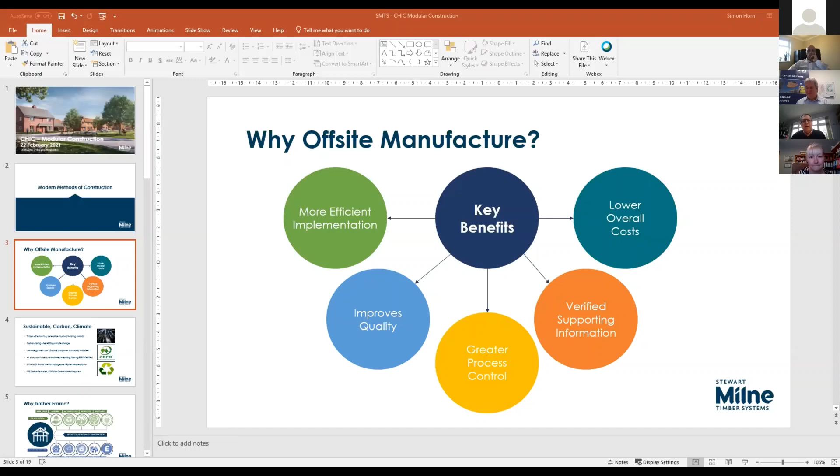Apologies, everybody. Okay, so yeah, why off-site manufacture? So more efficient, basically through the implementation program, because you're producing components off-site and then delivering them to site for assembly and installation rather than on-site construction. That's going to deliver quality because of the quality processes that we use within the manufacturing facility. And equally, that's going to deliver a greater process control to the project. And the project and the construction program is paramount because of not eroding costs to the project. So control of the program is key, and that process of off-site manufacture, just in time, delivering components into site, which is very efficient, but then equally maintains that program delivery for the overall construction program.

The supporting information, so basically the data to go with everything we produce, is verified, and to support that, those components and the solution for the project. So operational manuals, O&M manuals, easily achievable. Everything is produced in a CAD environment. We work on a BIM platform, so not necessarily people will work in BIM, but we adopt the principles of it because it's material control through the manufacturing process.

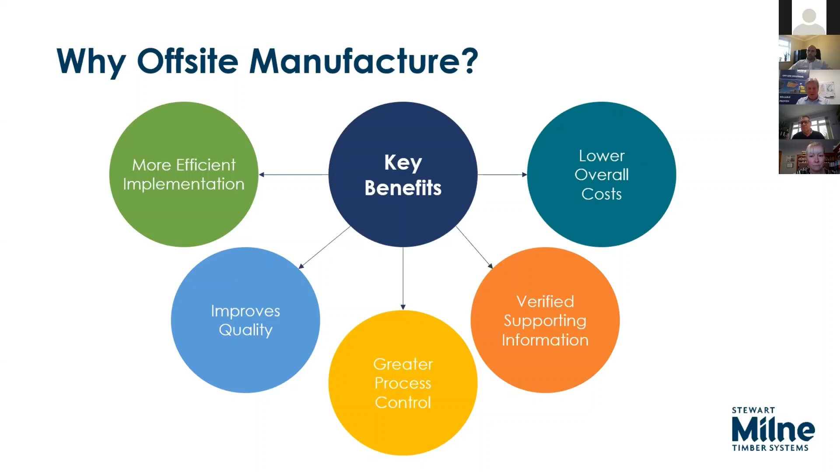Overall, if a project is planned, designed and delivered as an off-site manufactured project, it will deliver overall cost benefit back to the client and the contractor. If it's a late substitution, you've lost the efficiency of the early engagement that goes with off-site manufacture. That's a key requirement so you get the benefit through the program in the construction phase: early engagement and understanding of the solution being applied.

It's sustainable, it's a carbon positive solution, and it has a benefit to the climate because we use timber. It's the only renewable structural material that's out there. It grows naturally. We don't treat this lightly - it's a daily communication now in the press about climate change.

So for us, we get the structural capacity down through that timber. The homegrown stuff that's from Scotland and from Yorkshire doesn't grow so true, so we can use it for non-structural elements of the timber frame, but not for the structural walls.

Carbon storing - basically as the tree grows, it takes the CO2 emissions out of the atmosphere, which is again a key factor at the moment with carbon emissions and trying to get to carbon zero by 2050. By using timber, we're on that journey. The trees take in the carbon, store it within the tree as it grows, and it's locked in. It doesn't release it once the tree is felled.

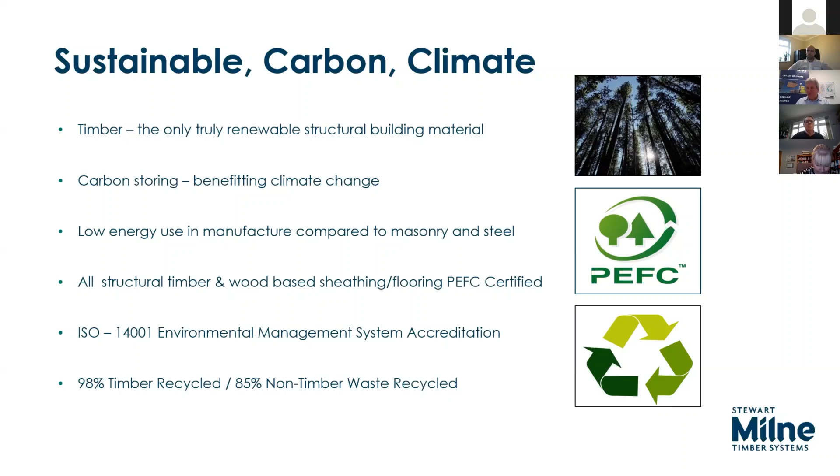I've mentioned it's a managed forest, so we're PEFC in our facility, and we know where all the timber is coming from. From our own business point of view, we're ISO 14001 and have an environmental policy. So timber anything we don't use is recycled - 98% of it - and 85% of cardboard, polythene, packaging, etc. is all recycled. Out of the yield of timber that comes into us, we use everything except about 3.8% at the moment, and 98% of that is recycled. So it's a truly carbon positive and sustainable building system and material in that respect.

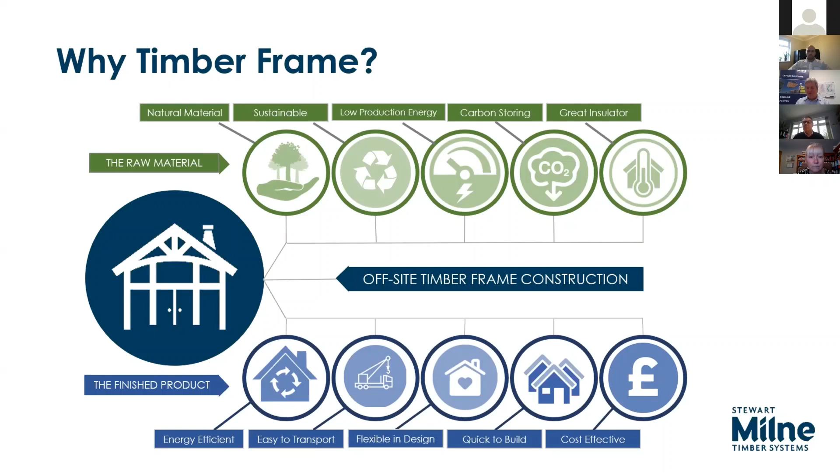I've touched on programs - generally for us it's a 4 to 5 day program for a pair of semi-detached houses or a large detached house. In 4 to 5 days the building is up and being handed over. And as I said earlier, if it's planned and delivered, it will be cost effective.

Then it goes out to site. We'll fit insulation, we'll fit windows in, and then it goes out to site for assembly.

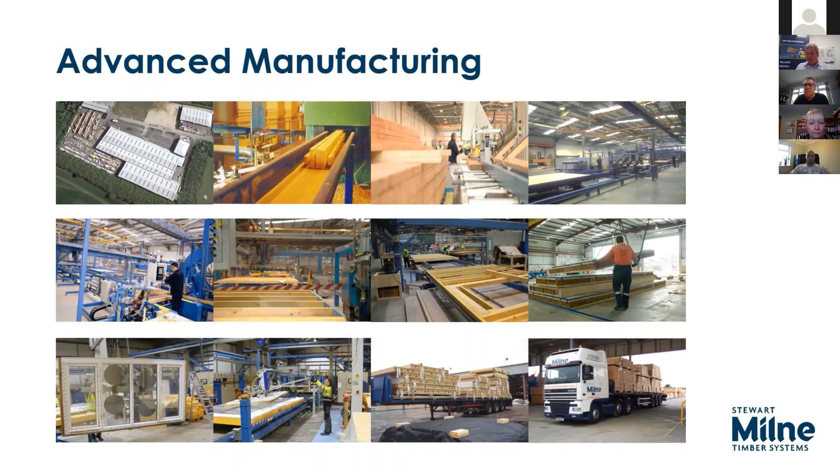That panel has got insulation in it. It's got the windows in it, and it's got the battens for the service void all fitted on the inside face direct from the factory.

The floor cassettes, again, efficiency - we'll make them as large as we can to then transport. Generally 9.6 meters is the limit for transportation, but we buy the joists 15 meters long. So it's very efficient for us to get the best cut of timber from the stack of joists that come in. The wall panel, first floor, then repeats up.

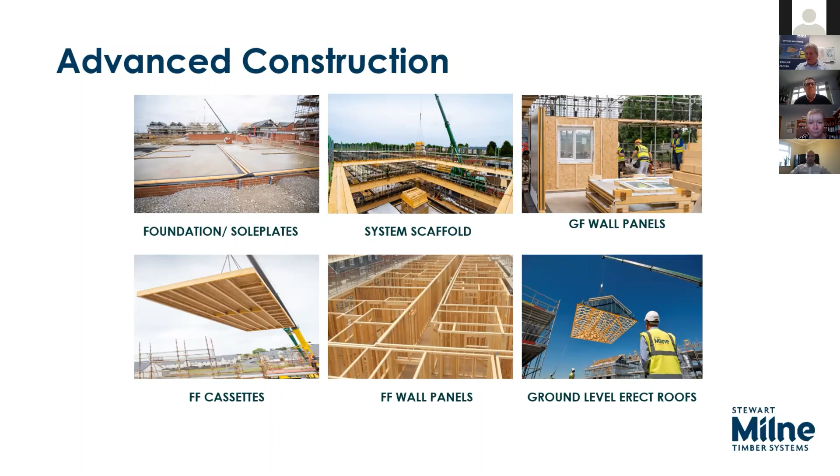It's platform construction in the UK, so ground, first, second, to the roof, etc. And ground level erect - again, health and safety benefits, working at height is eradicated by using ground level erect. So that roof has been framed on the floor and then lifted in.

The quality side of things, being off-site manufactured, is very controlled. We're in a factory environment, so we have all the accreditations to support that with regard to management systems, and then the third-party accreditations for the actual solutions that we are providing.

We've got a BOPAS accreditation for our closed panel, so that's a 60-year warranty, deemed as 2 mortgage cycles. The NHBC - we're approved under the NHBC Accept initiative for our off-site closed panel system. So those are the third-party accreditations that give confidence to customers and end customers that what has been built has been tried and tested and approved.

The BBA certification, again, goes with our closed panel system, being that it's a more advanced system. This is modern methods of construction. This isn't the timber frame of old.

As an MMC delivery partner, Stewart Milne will design and engineer a structure, make all the components, then install those components on site, and then hand that over to the developer or the contractor for fitting out externally and internally.

We've got our own homes business, so as well as Stewart Milne Timber Systems delivering externally to customers, we deliver internally within our group, Stewart Milne Homes. We've been doing that for 46 years - that's where it started. Stewart Milne Timber Systems and Stewart Milne Homes started in 1975.

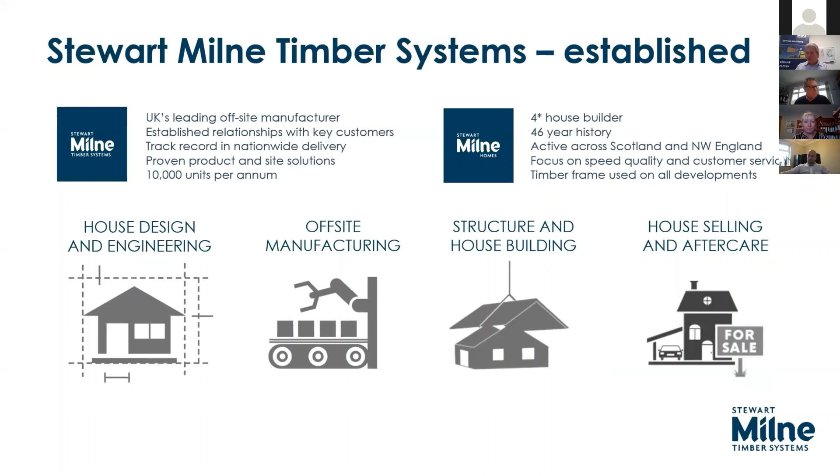We're UK spread - Aberdeen is the head office, but then we've got offices we call hub and spokes. The 2 hubs are Aberdeen and Oxford, and the spokes, for manufacturing purposes, are Grangemouth and Glasgow. We're looking now at one in the southeast as well, as a smaller manufacturing centre to underpin and support the larger manufacturing centres. This means we're a local supplier to the building site to support at the front end, basically.

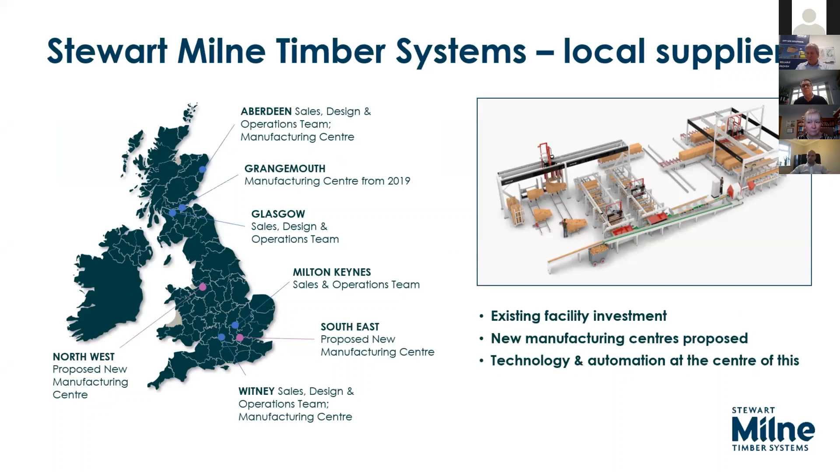They signed up for a framework to deliver everything using off-site manufacture and a panelised system for a 5-year period. We're in our second year of that 5-year framework with L&Q.

But equally, some of those other providers, including the CHIC organisation that we're here with today, are all recognised off-site manufacturer and Stewart Milne as a partner to deliver a panelised solution to the projects.

Equally, there's one consortium that have all joined - this is a real joined-up approach to delivering housing to local authorities, housing associations in the county of Hertfordshire. This consortium, headed up particularly by Watford Community Housing and Dacorum Borough Council, have all worked together, shared ideas, shared their thinking, and we are working with this consortium to deliver projects using a panelised solution.

A lot of these sites are brownfield sites because they're council-owned properties that are coming down and then being regenerated. So again, a panelised solution helps for that impact on the existing community - we're not there very long, it gets built very quickly, and then we're back out again.

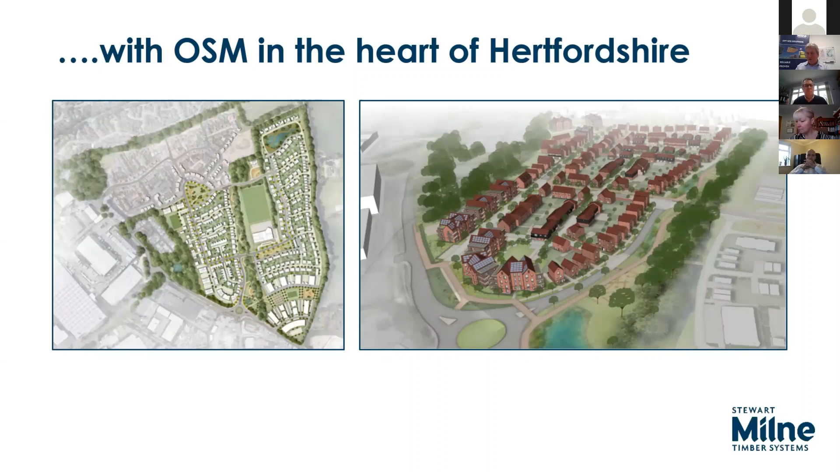The delivery partner for this is Countryside Properties, and we supported them with their bid for the project using a panelised system. It's 445 units, with apartment blocks in the bottom right-hand corner all built in masonry because of their size. Generally in timber frame it's medium rise, currently up to 5 to 6 stories, but with the expected change in Part B of the building regulations, that'll come down to a threshold of about 4 stories due to building height restrictions. It's a very successful project in development, and we hope to be hitting site later this year with the first units.

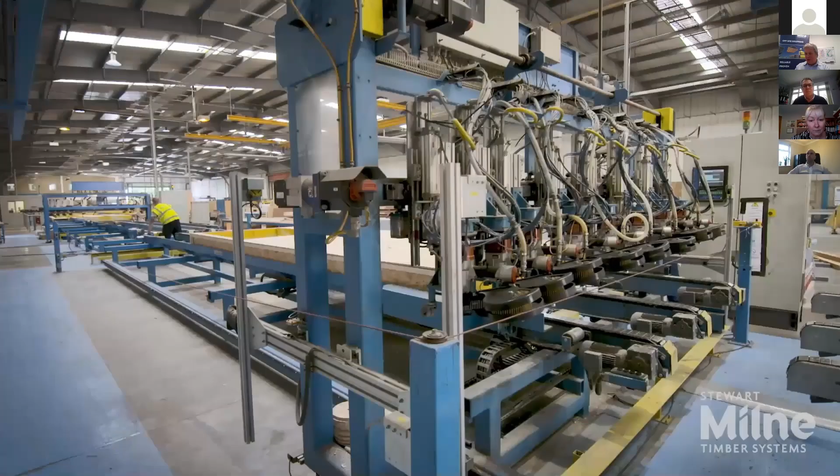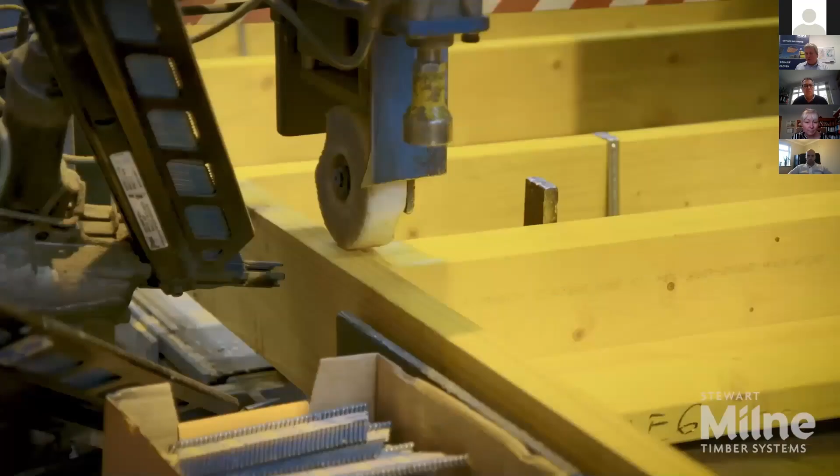This is our automated process in Witney, Oxfordshire - a moving production line. You've got a framing station, with a floor cassette going into it. This is the start of the wall line where the panel gets framed at the front end. The operative loads in the material, but the machines do the nailing up, which helps health and safety by reducing the risk. It's a much more efficient manufacturing process, driven by the CAD/CAM links I mentioned earlier.

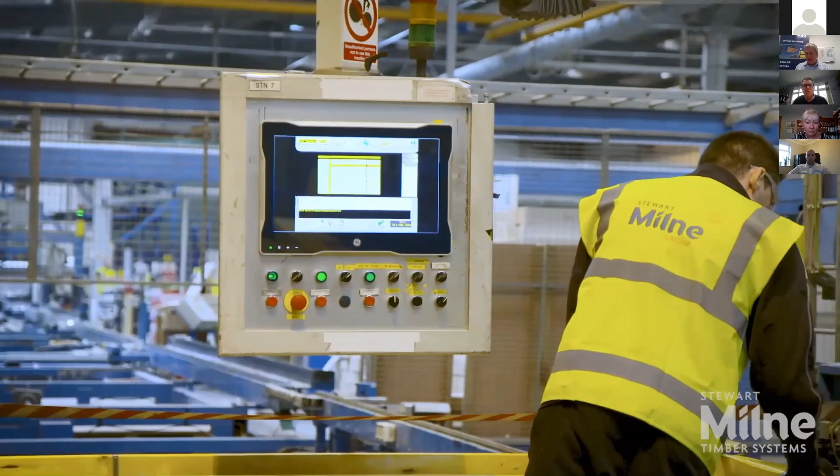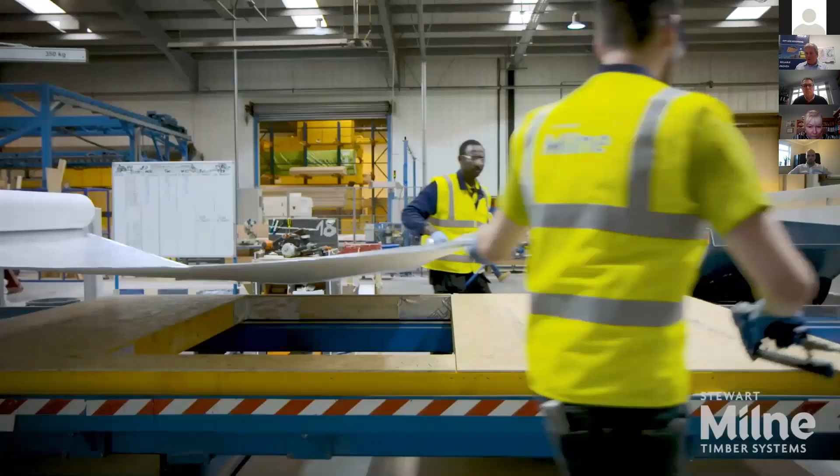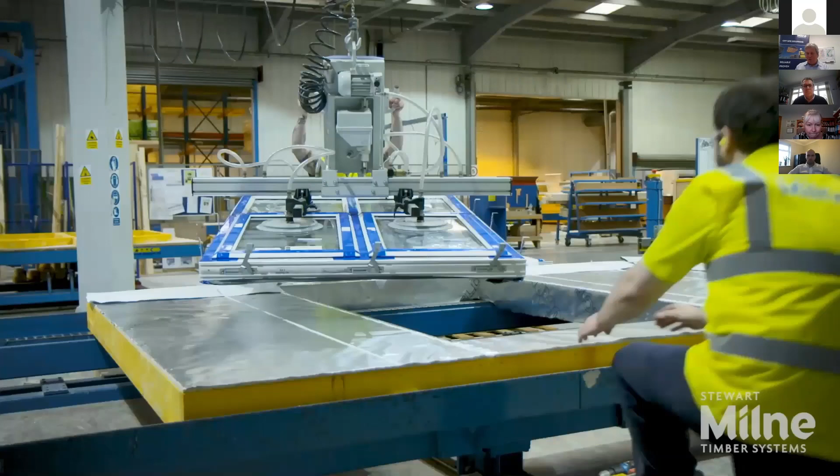We automatically blow in insulation when we get to the insulation station further down the factory - recycled glass. This is Knauf's product, recycled glass that they take and reblow back into fibre. That's now in the panel, and then the panel will be sheathed on the outside, again automatically nailed. Then the guys use a staple gun to staple on the breather paper, and lastly they'll fit in the windows down within the depth of the panel, and it will go off to sites where it will be installed.

So thank you very much, everybody. That gives you a brief snippet into

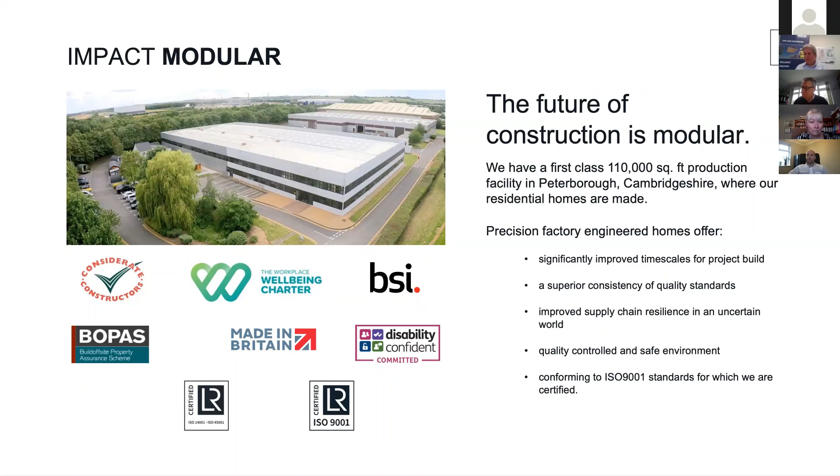We bring project certainty, higher quality, lower cost and faster delivery through our supply chain, logistics, digital design, parametric modelling and factory precision engineering.

Impact is a purpose-driven organisation, and we're committed to a transition to net zero carbon built environment in the UK and to ending fuel poverty. The government is relying on us to be the innovators and help bring the green recovery to life.

MMC can provide up to 67% reduction in energy consumption during construction compared to traditional methods. So sustainability is our top priority, and we require a supply chain to conform to our strict criteria. This applies to procurement, manufacturing, transport, construction, and also waste.

A single act has had a detrimental effect on the world as we know it, changing it forever. It really just goes to show how delicate the world is and how quickly it can change if we're not paying attention to our actions.

Post-COVID-19, the construction industry will never be the same again. Social distancing is far more effective in a factory, and to date we've had no spread of infections.

Now to design. We have an internal design team that are actively involved in every single project that we do. We also act as advisors to our external clients and provide support for planning submissions and detailed designing. We offer that full design service: technical design, energy modelling, M&E design, parametric optimization of sites, and digital client engagement.

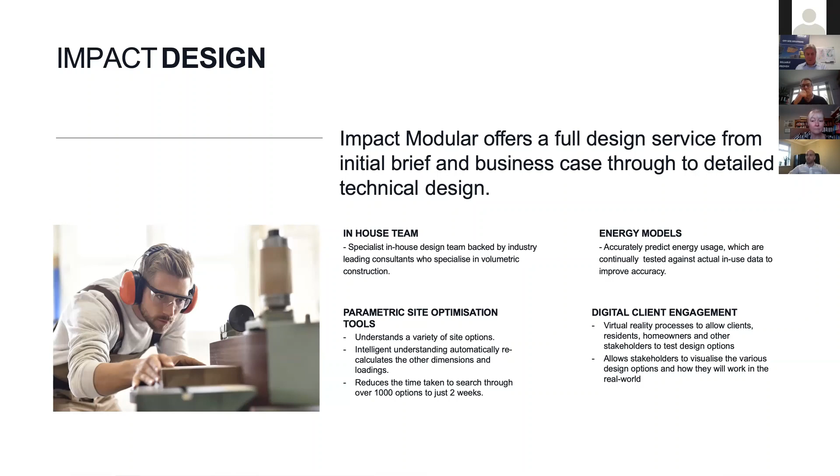We've created a design book providing a standardised housing range, and we've developed cost-effective solutions for the housing associations, local authorities and developers that we've been working with. But we also really enjoy working with clients to design their own standardised models.

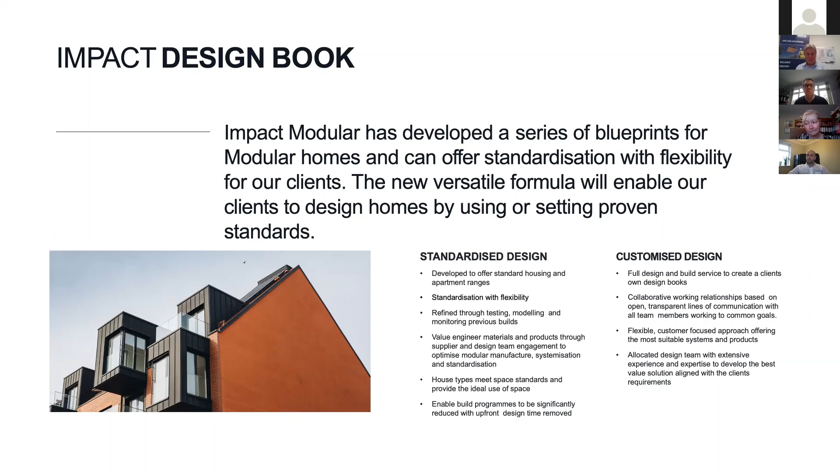We continue to work with like-minded organisations to deliver those sustainable homes for the future. And we've worked with the likes of Bristol City Council, the YMCA and the NHS.

Our most recent project that we've completed is over in Bristol, providing transitional housing for the most vulnerable in our society. Bristol City Council and the YMCA needed an innovative solution to provide move-on accommodation to young people who were on low income and making their first steps into independent living.

We built 11 homes, which are all now occupied, 2 of which house community builders whose roles are to bring together the residents and encourage participation in the wider community. The units are designed to be carbon neutral and generate all of the energy they need.

The team at Impact Modular was so excited to be part of this good cause and allowing the residents to move in far quicker than the traditional build.

I'd heard a really good story back from one of my project managers. He'd noticed one of the new residents was taking pictures of their bins, and he said, what are you up to? The resident said they'd always dreamed of having their own bins and being able to put them out every week. It's just those sort of things that we all take for granted, and probably a bit of a bother putting the bins out, but it's hugely important to some people.

So it's all of our responsibility to make a change. So what impact will you make?

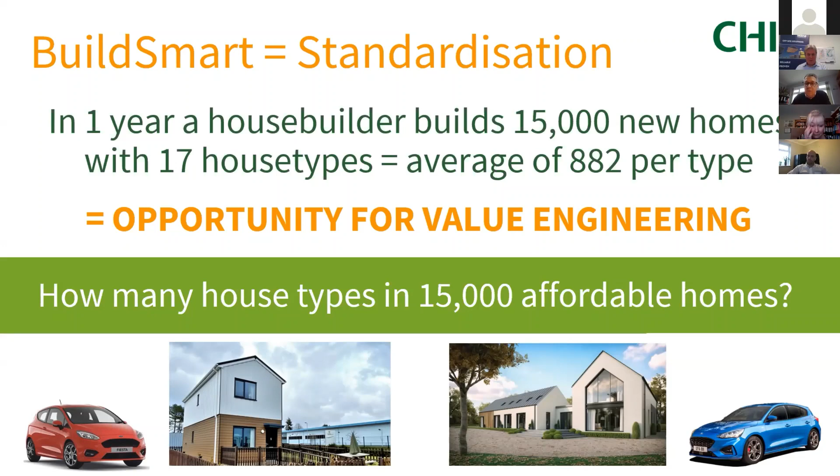So very simplistically, what we were trying to do with Build Smart was to get our members of CHIC together and collaborate by working together to achieve some standardization, working with a limited number of particularly manufacturing and contracting partners, and together drive some of that standardization and efficiency.

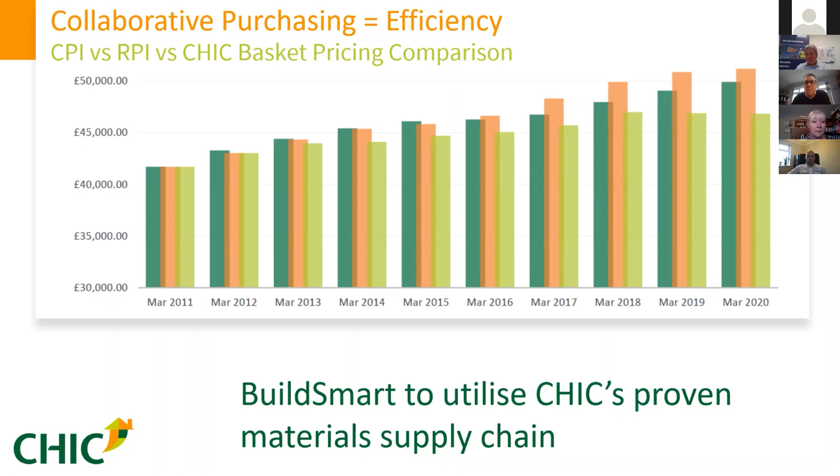It's basically trying to take, for Build Smart, those principles and apply them to new build housing. The business case - both Simon and Jack have talked about already, so I won't dwell too much on this - is about efficiency, less carbon, and standardization.

But if we just look at two major benefits I want to pick up - one is the impact on the neighbourhood. A lot of the housing we build - I think Simon said his sites in Hertfordshire are all brownfield - that means by default you're building homes next to other people's homes. If we can cut the site time and disruption down for existing residents and neighbours, that's a significant benefit, and that's one, to me, of the great benefits of MMC.

The other one is about what happens after practical completion. The development world suffers badly from post-completion defects, and particularly customers suffer badly from that. The ability to develop housing in an organised, properly structured and controlled manufacturing process significantly cuts defects. For both of those the benefit is the resident - existing residents with construction next to them, and the new residents of the new homes who have a defect-free existence in their first months and years.

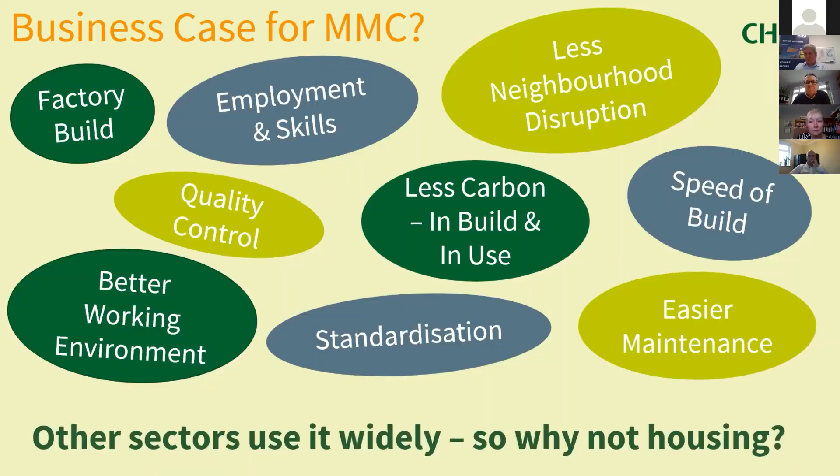So the CHIC solution, launched back in 2016, was that we'd have a CHIC member engaging with a main management contractor - an ordinary design and build contractor that you all work with on a regular basis - who could either build brick and block. We can't get the big lorries and cranes to some sites, so there will still be brick and block housing as a matter of fact.

But could also work with off-site manufacturers, so that could be a timber frame and panel solution, it could be a full MMC solution, and we wanted to explore what those opportunities were - all potentially supplied by CHIC materials, because we know we can achieve savings of £2,000 to £3,000 per property based upon our purchasing capability through collaboration. So that's what we set out with in 2016.

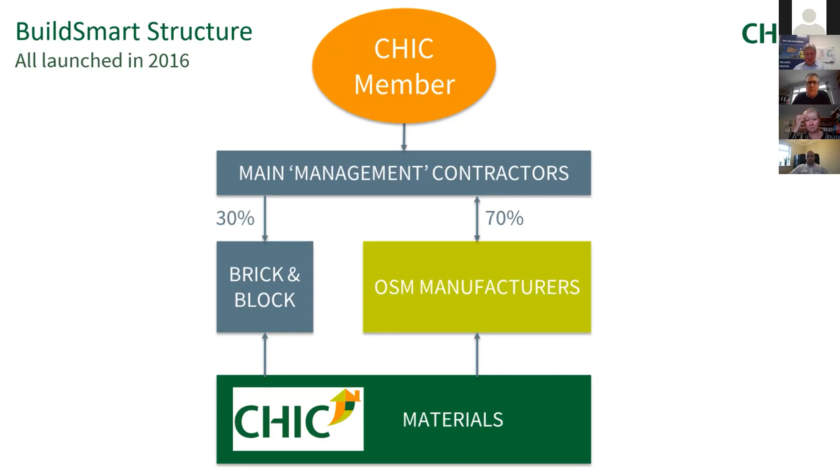The procurement process we went through initially procured two partners: Simon's organisation, a 15-year 5+5+5 contract, and an MMC contract with Premier Modular Limited. Since then, we've provided an interim contract, needing choice and flexibility for some members with a company called Totally Modular. So that gave us three contract opportunities.

But what we did was go back and look at what worked and what didn't, and how it worked.

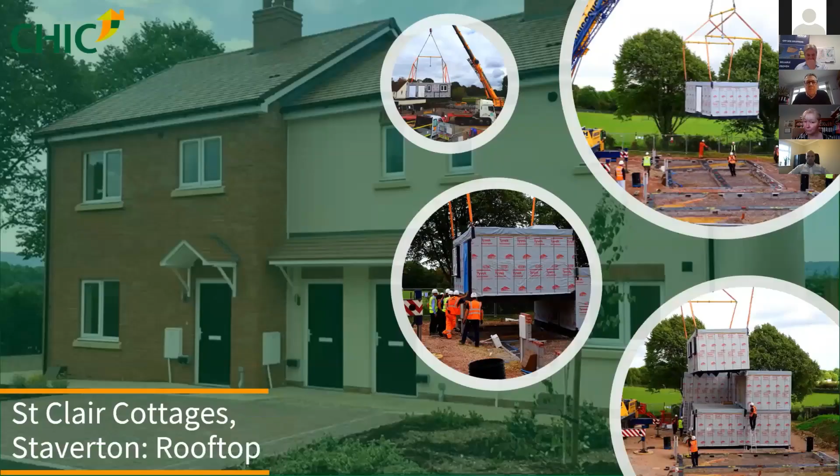As this slide and the next show, a scheme built by Premier Modular working with Harper's—a small scheme in Staverton for Rooftop. This is a fully modular scheme, but the cladding, both render and brick, was carried out on site. You can see the modules there being put in place, and there's the finished product, fairly traditional in approach. As most people will say when they look at it, you wouldn't know it's built through MMC.

So what did we learn and where have we moved this on to? Both Simon and Jack talked about process. Process is critical—the process we tend to adopt in social housing isn't particularly efficient for a manufactured solution. Design is critical, standardization is helpful, so getting the manufacturer engaged at the beginning of the process is really important. That means we have to think about process differently.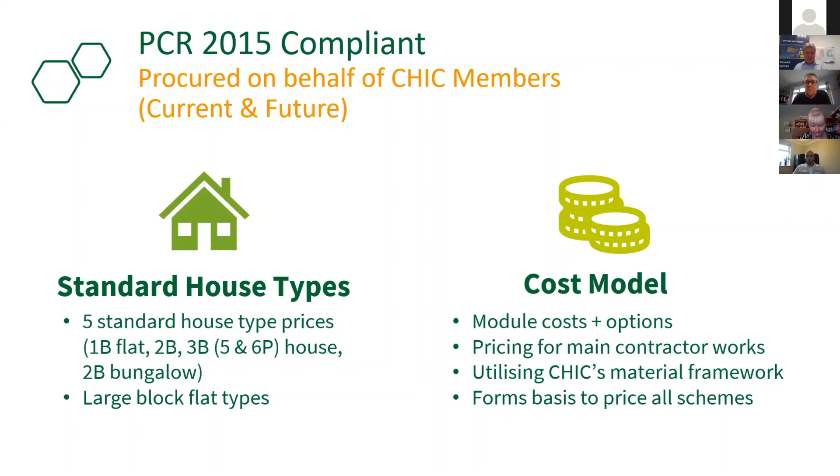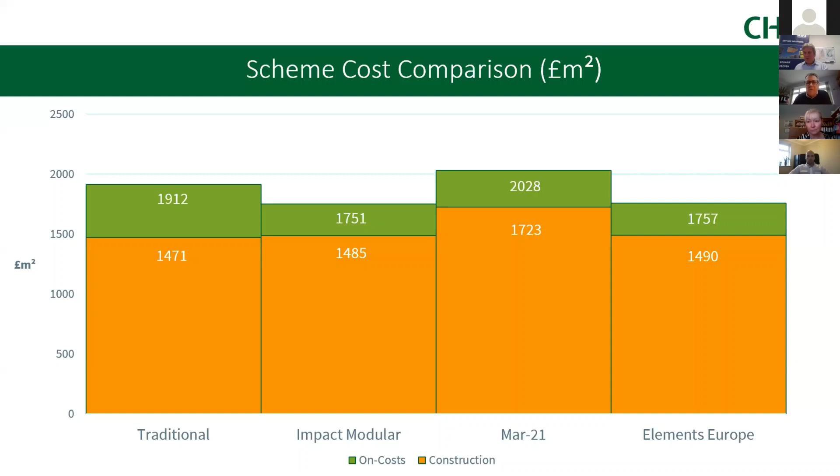We strongly believe that all of our partners can deliver cost-effective solutions, provided we adopt the principles of early engagement, manufacturer engagement, design, standardisation, etc. The cost issue is something which must be addressed, and will be addressed, and will come down in terms of output costs as we're able to build volume across organisations like CHIC.

There's hidden value as well. My colleagues have talked about carbon. The foundations are more simple. I've talked about neighbourhood disruption and fewer defects, but particularly that lower running cost—for examples like the Vista one that Simon showed us—is really, really important.

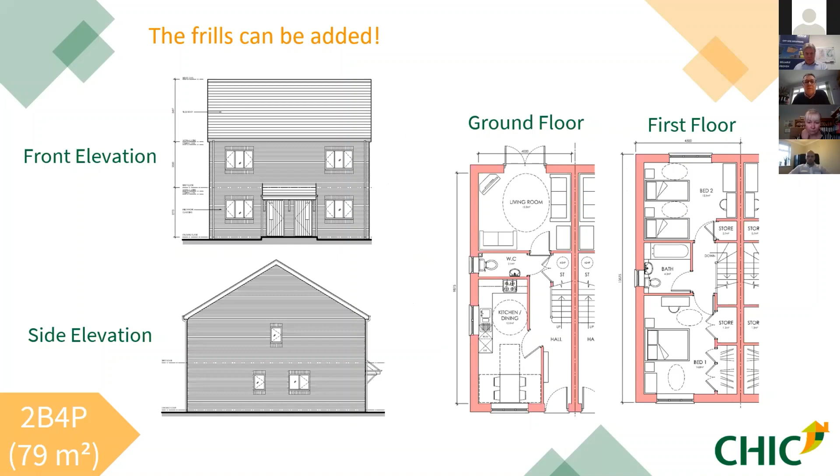CHIC standard house types—we've got a fair range, but as you'd expect, they've been designed to be efficient in manufacturing terms, to meet all the required current standards, and to be transportable to a site for construction. There's the latest version of the show house, which I've shown you a couple of pictures of already. The internal layout's been value engineered since, but the basic footprint is the same. It can be developed in 2, or if you want to go 2.5 storey, 3 modules per house.

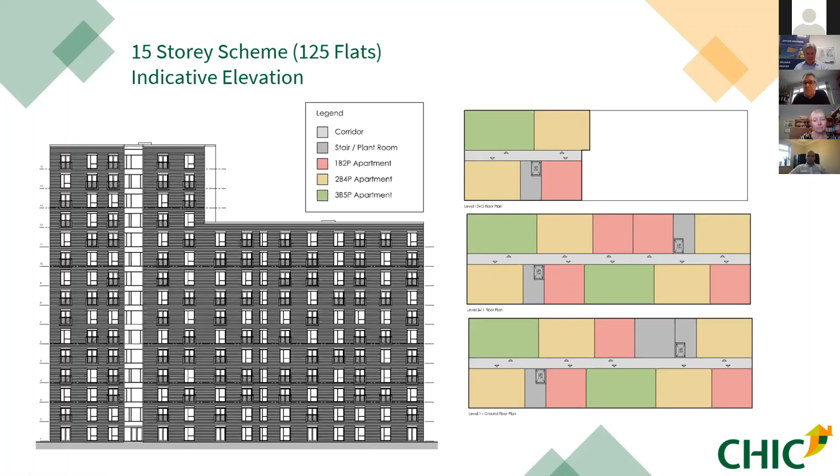I talked about high rise—Elements Europe within their offer can do medium and high rise. Again, we've got some standard flat type designs. This was a scheme we used for the tender, 125 flats in what would be a fairly dense scheme. Interestingly, Elements are also able to offer room pods as well, so it could be a more traditional construction but with room pods being inserted.

Just to finish, we've got quite a range of offers within CHIC, but we still find a fair amount of resistance in the market from organisations unwilling to embrace MMC. So there is, as we know in housing, a bit of prejudice against it—mistrust of cost, around mortgageability and so on and so forth.

So behavioural change—we have to look at how we do things, accept that MMC is the future, not just an irritant. Process has got to change so we can get manufacturers in right at the beginning. On the assurances, particularly on Simon's slides, he had a number of organisations they work with, but some of them think slightly differently. Trying to get them aligned would make manufacturers' lives somewhat easier and end users' lives easier.

Similarly, regulation on issues like cladding—let's be very specific about what we can and can't use. But standard doesn't mean it has to be exactly the same. The core can be consistent and efficient, but how it's finished can be down to local design with different finishes, and Simon's photos and Jack's photos showed the sort of variety that's possible. We need to make sure the manufacturer engages with contractors and that we get that synergy to work, completing it both through skills development and through the supply chain, with engagement of material suppliers.